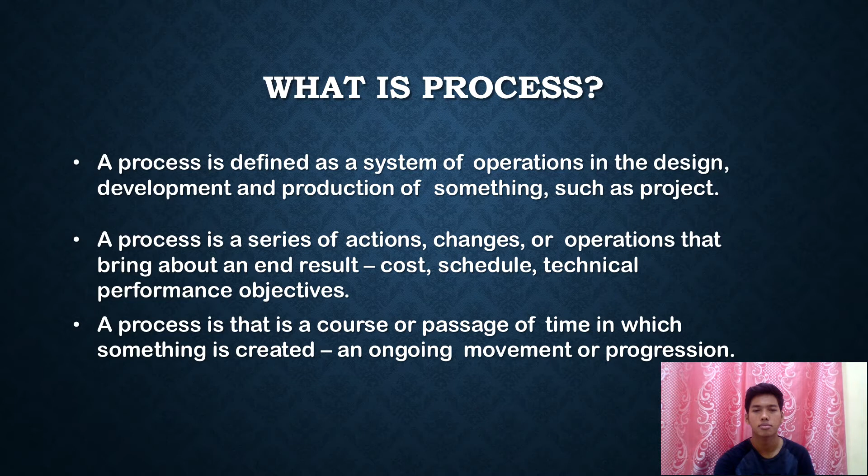What about the construction process? The construction process begins with the client who has a need for the facility. The nature of the risk is influenced by this process of purchasing construction. In construction, since the item purchased is to be produced, there are many complex issues which can lead to failure to complete the project in a functional and timely manner.

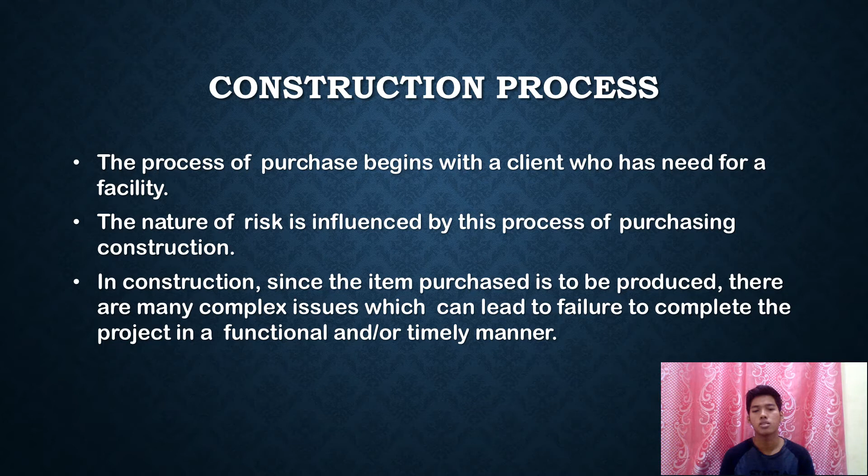Next is the project life cycle. There are four phases. The first phase is the conceptual phase. The things they do are: determine that a project is needed, establish goals, estimate the resources the organization is willing to commit, sell the organization on the need for the project approach, and make key personnel appointments.

The next phase is the planning phase. They define the project organization approach, define the project targets, prepare the schedule for the execution phase, and define and allocate tasks and resources to build the project team.

The third phase is the execution phase, where they perform the work of the project, such as design, construction, production, site activation, testing, and delivery.

The final phase is the termination phase. First, they assist in the transfer of the project product. Second, transfer human and non-human resources to the other organization. Third, transfer or complete commitments. Fourth, terminate the project. Fifth, reward personnel.

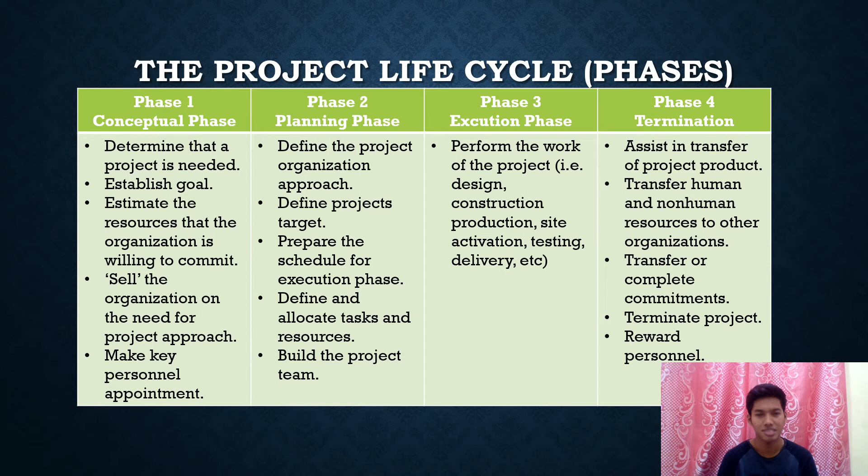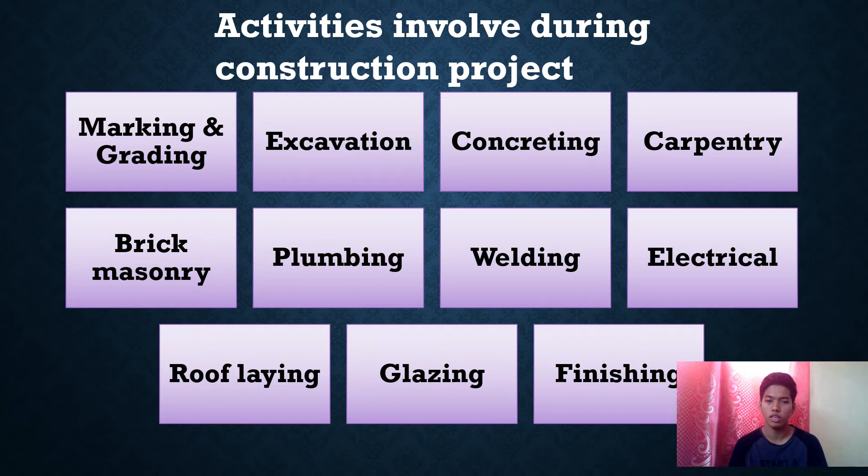Next, we move to the activities involved during a construction project. There are 11 activities involved in a construction project. The first is grading, or marking grading.

Marking is one of the first construction activities, which involves marking out the area of the plot for reference. This helps workers orient themselves in terms of their workplace. Grading helps ensure that buildings are even, last long, and maintain maximum support. There may be particular circumstances where construction requires a slight incline or decline to the base surface. In this case, it's very important that the incline is exactly the correct angle—it's a matter of safety and plays a major role in construction management. Grading uses big machines to help ensure the space is level or at the appropriate angle it's supposed to be.

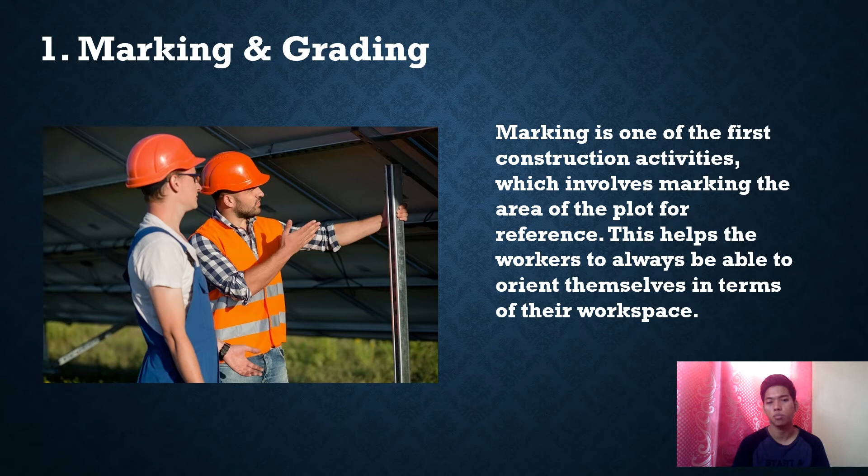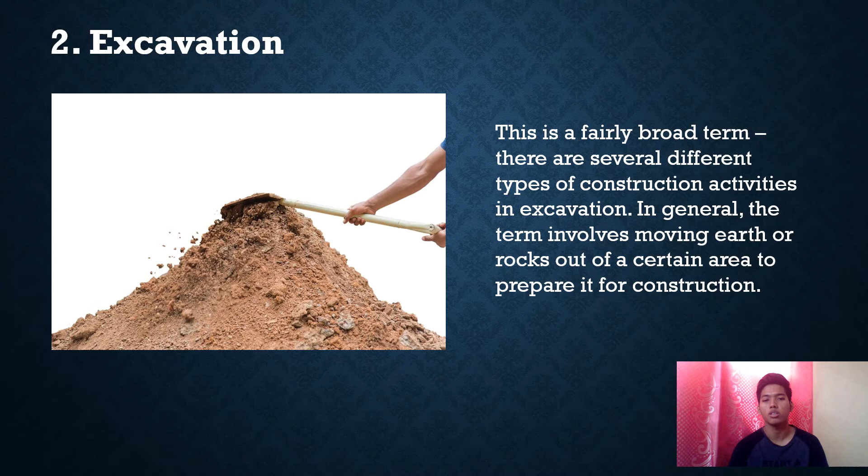Second is excavation. This is a fairly broad term. There are several different types of construction activity involved in excavation. In general, the term involves moving earth or rock out of a certain area to prepare it for construction. This includes basement excavation, which digs the earth out to prepare for building the basement. It also includes mud, rock, and topsoil excavation, all of which involve removing substances from the workplace.

The third is concreting. The process of pouring concrete is another major activity in construction. This is often used for the base of buildings, for roads, bridges, pipes, and many other applications. One reason it has become so popular in the construction industry is that concrete is easy to make in large quantities and it can change state, so it's easy to work with and manipulate.

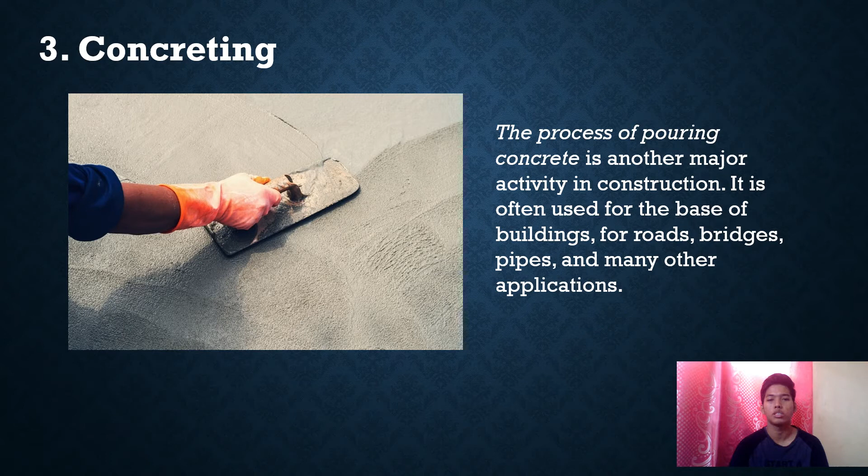After that, carpentry.

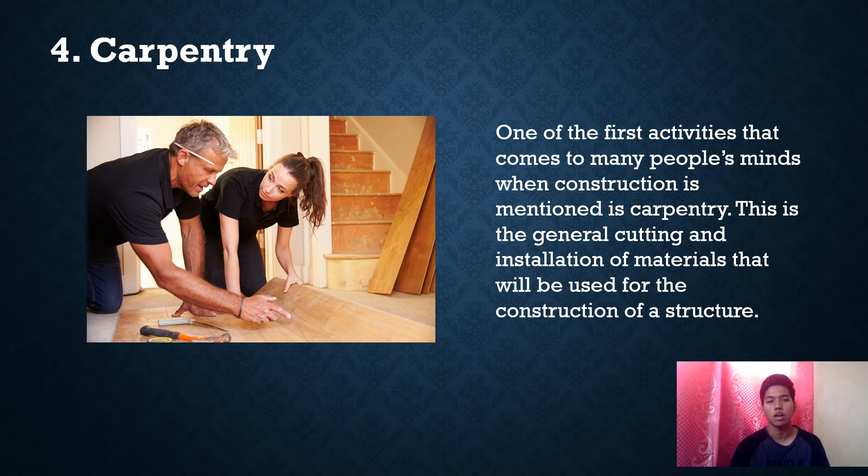One of the first activities that comes to many people's mind when construction is mentioned is carpentry. This is general cutting and installation of material used for construction of a structure. Carpenter used to be a word that described an individual working with wood specifically, but now carpenter means working with several different materials.

The fifth is the brick mason. Brick has been used in construction for decades and is still often used today as a high efficiency material. Brick masons lay brick to ensure it is laid in a way that is structurally sound. For example, laying each brick one on top of the other allows cracks to go all along the entire wall. If the bricks are offset, as you will often see, it makes cracking of the mortar less likely.

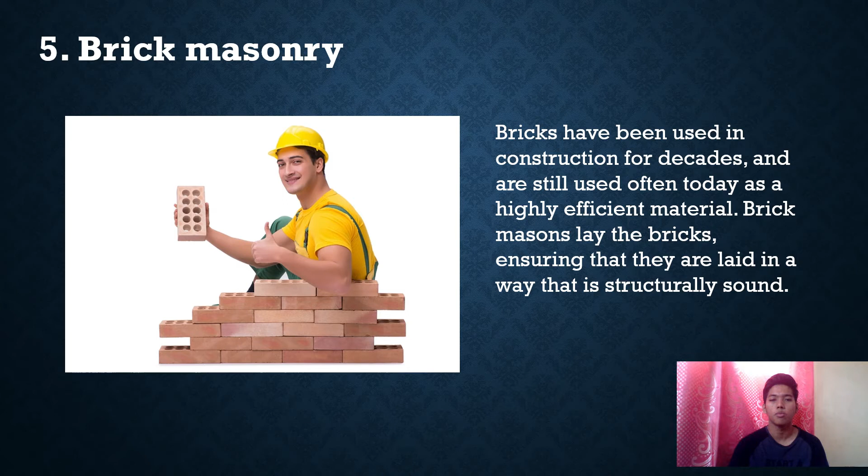Next is plumbing. Plumbing is in structures that require it. There are specific plumbing activities that must occur to ensure they function properly. This includes putting in piping and fixtures for both incoming potable water and outgoing waste.

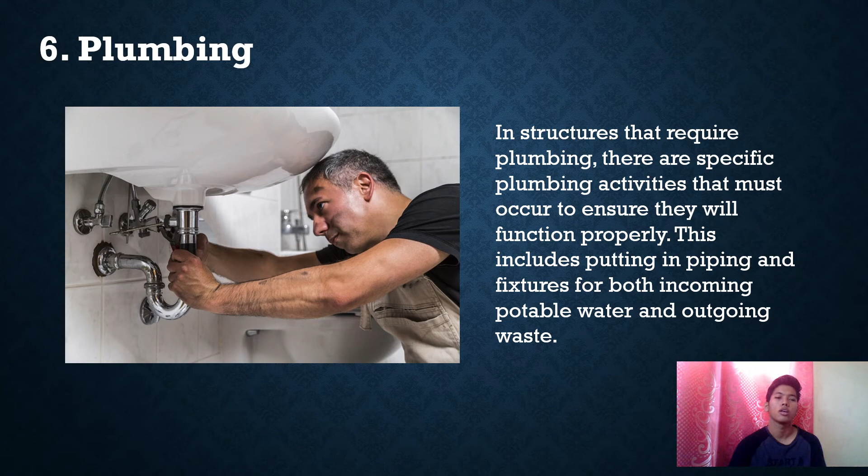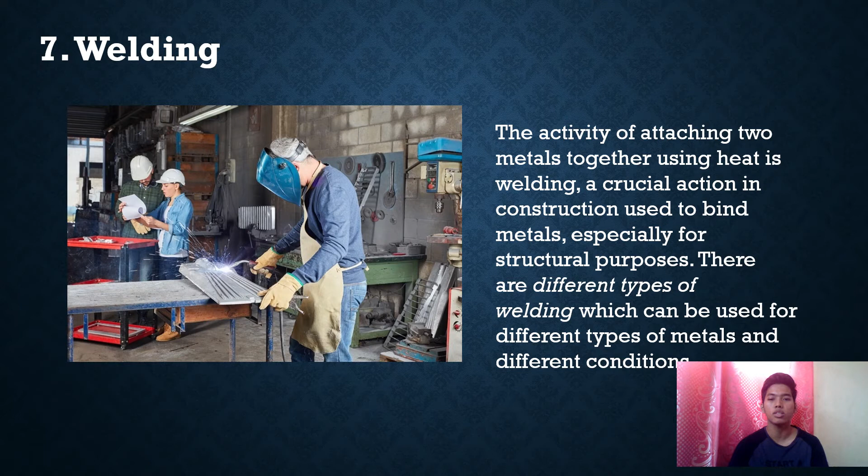The seventh activity is welding. The activity of attaching two metals together using heat is welding, a crucial action in construction used to bind metals, especially for structural purposes. There are different types of welding, which can be used for different types of metal and different conditions. Welding is an extreme skill and can be difficult to master. It is also dangerous, so it's important that construction companies have strict safety guidance.

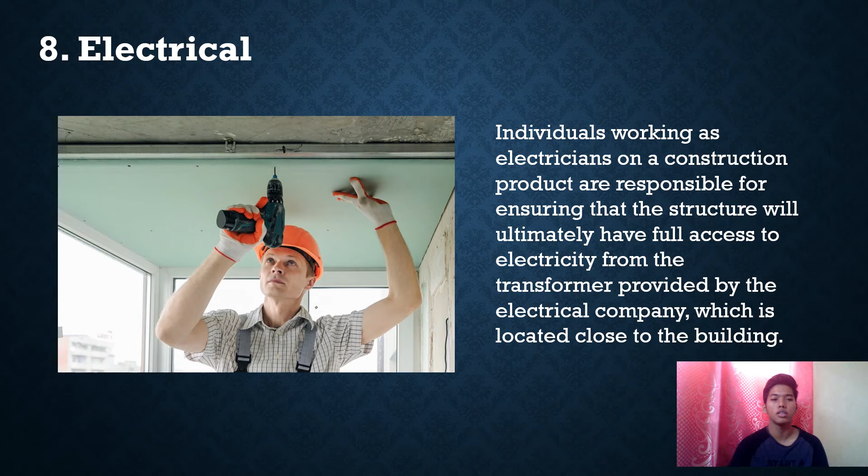The eighth activity is electrical. Individuals working as electricians on the construction project are responsible for ensuring that the construction ultimately has full access to electricity from the transformer provided by an electric company located close to the building. There are several steps involved in the installation of electric in a building, including temporary electric that needs to be installed, and finally the real installation which will be used in that building.

The ninth activity is roof laying. Roofing is an important construction activity for ensuring the protection of the structure from the elements, and it can help provide stability for the structure. There are different methods used for roofing. Shingling is common in residential roofs, but there are also metal, polycarbonate, and slate roofs, as well as many others used for different purposes.

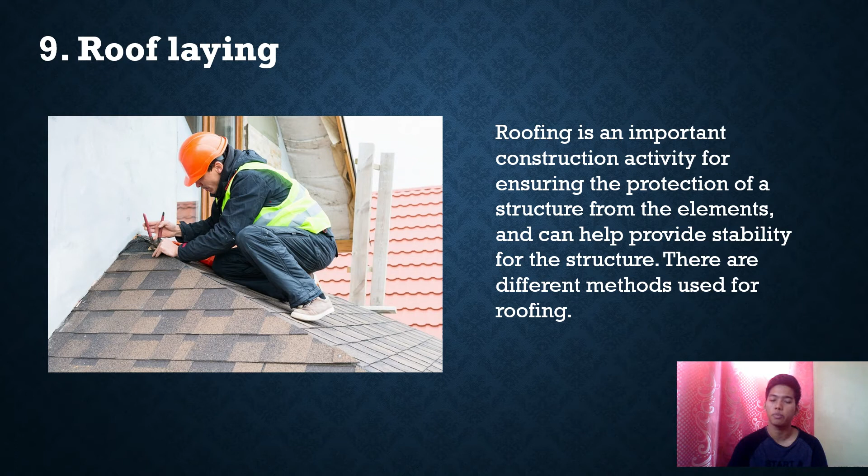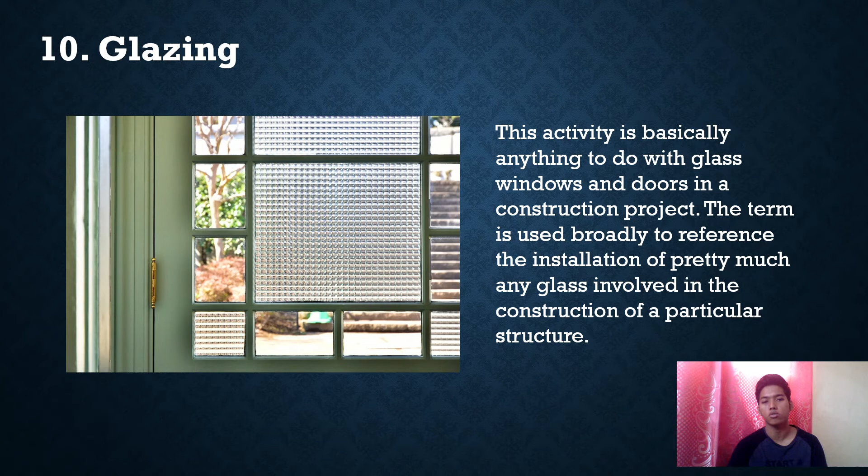The 10th activity is glazing. This activity is basically anything to do with glass, windows, or doors in a construction project. The term is used broadly to reference the installation of pretty much any glass involved in the construction of a particular structure.

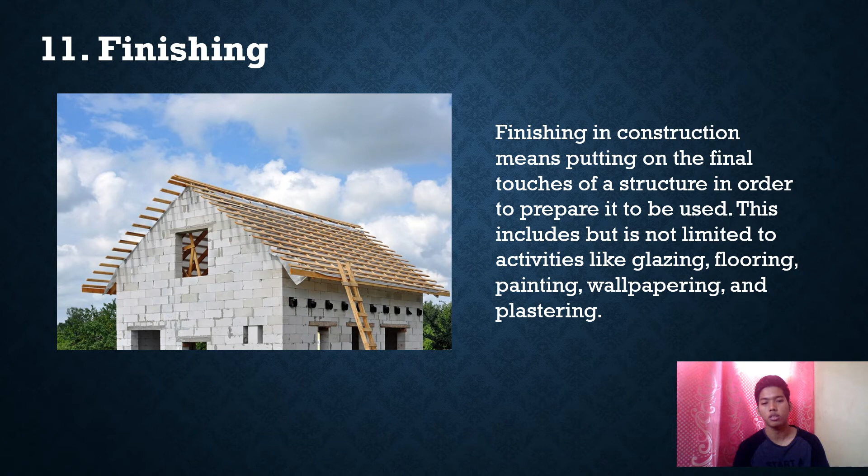The last activity is finishing. Finishing is a construction term meaning to put on the final touches of a structure in order to prepare it to be used. This includes but is not limited to activities like glazing, flooring, painting, wallpapering, and plastering. It is most often about the final aesthetic touch, and less about safety and function, although all finishing activities are a crucial part of the final construction product.

Next, we are going to move to the key players. There are four key players involved in construction technology.

First is the owner, or the employer, also called client. The owner is the person who actually arranges money for a particular project. The owner is the real instigator who has to launch the idea. The owner may be a person or the government, or provide the fund and funding agency for the project. The scope definition is also provided by the owner.

The second key player is the contractor. The client engages a contractor to carry out the building project and construction work. These are the people with the technical know-how to get the structure off the ground.

The third is the supplier. A supplier is a party that supplies goods and services. In construction, the goods include any material that goes into the building structure, while the service refers to all the different work packages agreed upon by different parties pertaining to the development of the built structure.

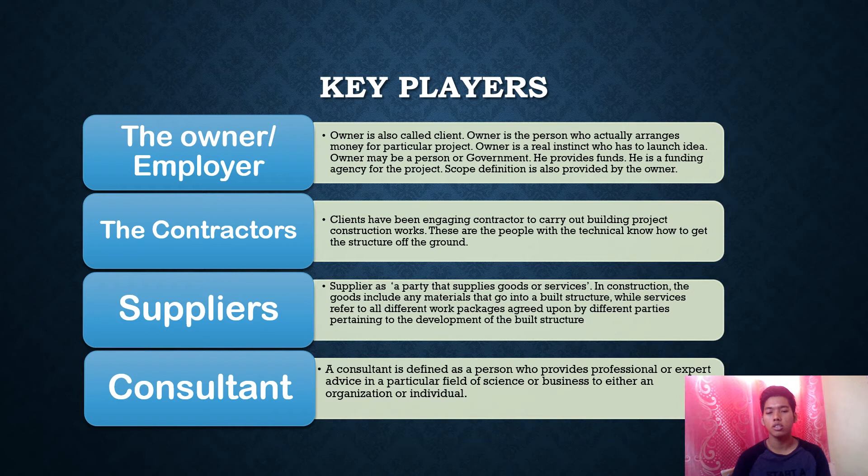Next, we move to project planning and controlling.

Project planning: in the planning phase, a plan is made and strategies are set, taking into consideration the company policy, procedure, and rules. Planning provides direction, a unifying framework, performance standards and helps reveal future opportunities and threats.

In planning there are steps to follow. First, the objective of the project is defined. Second, goals and stages are set as intermediate steps to attain the final target.

Third is the forecast and means of achieving the goal, like activities. Fourth is organization - resource, financial, managerial, and operational - to carry out activity and determine what is feasible and what is not.

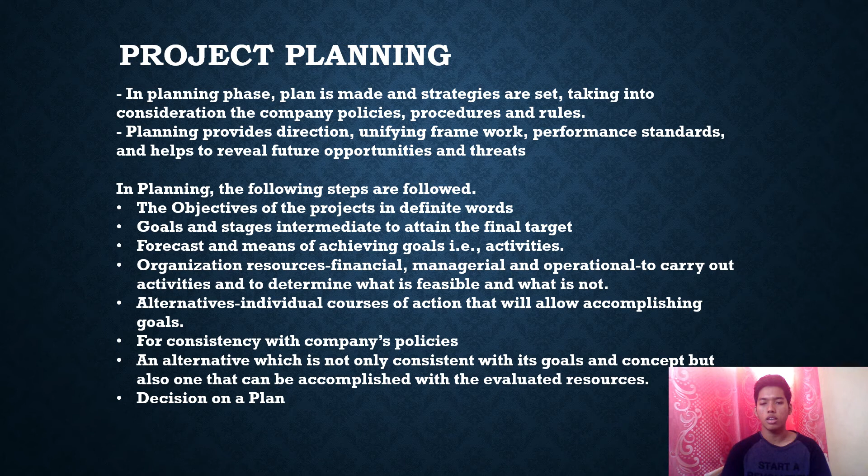Fifth is the alternative individual course of action that will allow accomplishing the goal. Sixth is consistency with company policies. Seventh is an alternative which is not only consistent with the goal and concept, but can also be accomplished with the evaluated resources and the decision of the plan.

In project planning, there are three types. First is forward planning, second is backward planning, third is combined planning. Forward planning starts from the initial event and builds up the event and activity logically, sequentially until the end event is reached.

Backward planning is when the planner starts with the end event and arranges the events and activities until the initial event is reached. The planner asks himself: if we want to achieve this, what event or activity should have taken place?

The third is combined planning, which is both forward planning and backward planning. At any stage, a planner may need to traverse the network back and forth several times until it's found to be satisfactory.

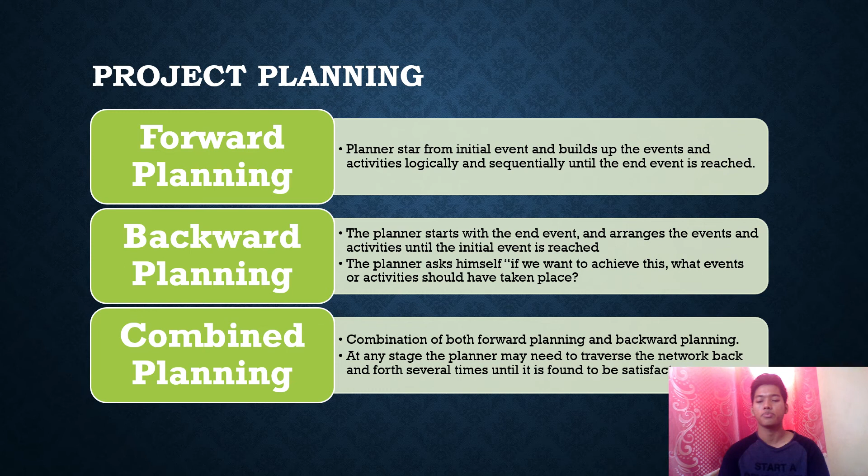Next is project controlling. This phase is carried out during the execution of the project. The difference between scheduled performance and actual performance is reviewed once the project starts. This is established to determine deviation from the basic plan, to determine the precise effect of this deviation, and to re-plan and reschedule to compensate for the deviation.

For controlling, the following steps are followed. First, the standard and target are established, and targets are generally expressed in terms of time. Second, performance is measured against the standard set down in the first step. Third, deviations from the standard are identified.

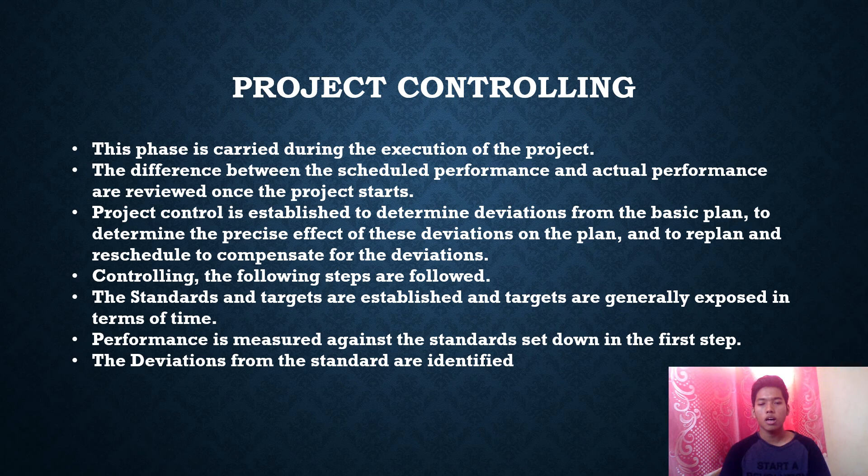Lastly, we move to successful construction. There are five points. First, implement continuous planning. Second, build an effective communication flow. Third, re-evaluate your workflow. Fourth, use automated construction project management solutions. Fifth, control cost the smart way.

Implement continuous planning: a construction manager should start planning long before a project begins and continue to revise and develop the plan until the project ends. The design, pre-construction, and procurement stages of each construction project require initial planning, and each may need to be revised as the next phase begins.

The second point for successful construction is building an effective communication flow. Communication is crucial in every phase of any construction project. Building an effective communication flow will facilitate coordination between all parties. Transparent communication will make the process smooth and reduce the number of emails and phone calls whenever there is an issue.

Next is re-evaluate your workflow. The purpose of construction project management is to ensure the project is completed on time, within budget, and reaches the target. However, even if the project runs well, you still have to evaluate it - there might be a better way to manage the project or overcome issues.